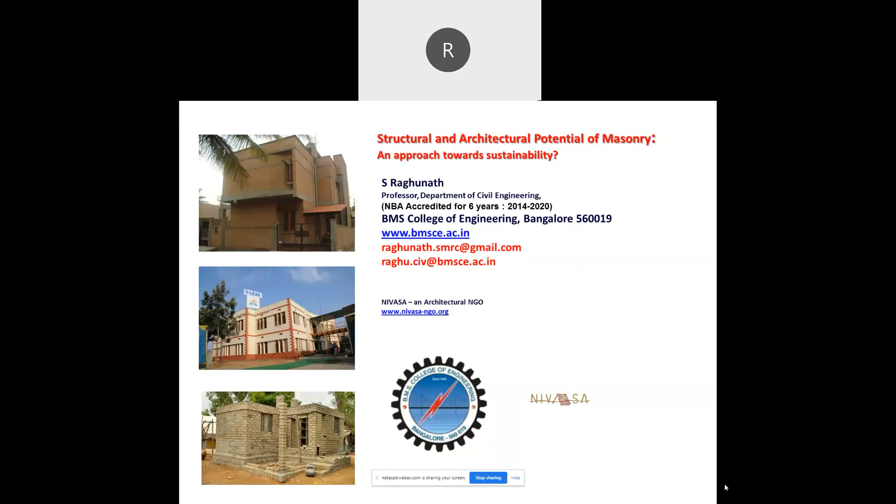I'd also take this opportunity to compliment the organizers for carrying out this workshop for faculty members on sustainable design with pre-engineered design and approach towards eco-friendly design. It's a relevant topic in the current context, and I think it's a good program for faculty members to be involved with. I also saw that quite a good number of eminent speakers are there; my professor, my teacher, Professor Jagdish, was there yesterday, and he is the best person to introduce this course to any participant.

I'm going to discuss a sustainable approach, or rather, I'm going to introduce masonry.

Just a minute, there's some problem with it.

Yeah, I'm going to discuss masonry by dividing my lecture into five parts. Initially, I'm going to discuss sustainability, my personal thoughts on sustainability, and then I'm going to introduce masonry from that lens: how masonry can be considered sustainable. Then I'm going to share the bulk of my content through an introduction to structural masonry and refer to quite a few examples of historic masonry structures.

Then I'm going to move towards the end of my lecture by arguing that masonry can be considered a sustainable construction in many aspects and contexts, and then end my session with a few concluding remarks.

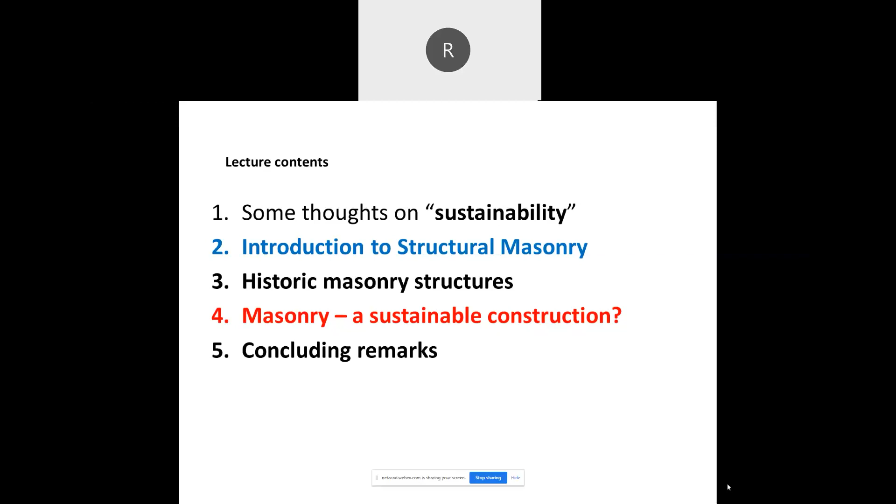You can also talk about sustainability in terms of a time frame, in a context, in a situation. What is sustainable in one context may not be sustainable in another context. What is sustainable in the short term may not be sustainable over the long term. There have been people talking about short-term sustainability and long-term sustainability, though it appears to be some kind of an oxymoron.

By and large, all of us understand sustainability with one clear-cut definition. A sustainable society is considered one in which the society grows, or manages its economic growth, in such a manner that there is no irreparable damage to its environment. This is something most of us would accept. Personally, I also accept this definition.

It satisfies the needs of the people without jeopardizing the prospects of the next generation. So we need to protect our environment and hand it over as a good legacy to the next generation. That's the meaning of a sustainable society.

Although sustainability is being talked about more and more in the current context, Joseph Kumarappa talks about sustainable development in his book, The Economy of Permanence, a very neatly written book, easily comprehensible even by non-economists. He talks about the economy of permanence and equitable development. That is also a very interesting book one can refer to. It is available as open source.

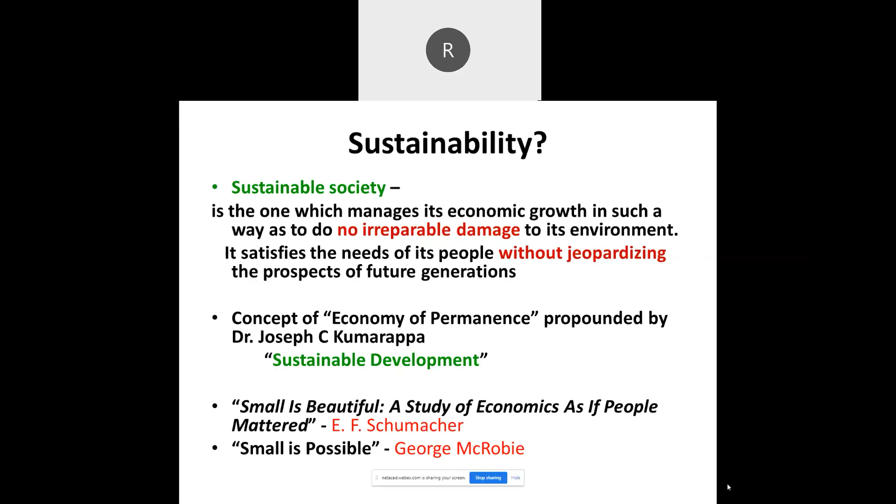Small is Beautiful is a book written by Schumacher. It talks about economics as if people matter. His contemporary and junior, George McRobie, also wrote a book called Small is Possible. These are some of the important background through which I have understood sustainability and tried to contribute to this field of engineering.

The two key concepts of sustainability: first, the concept of needs, in particular the essential needs. You can talk about vital, essential, and desirable needs. The essential needs are those to which overriding priority should be given. If you are able to balance the needs, one can approach sustainability in an easy manner.

Something, either a technology, a product, a process, or a material, is said to be sustainable if it is economically viable, environmentally friendly, and socially acceptable. If all three are satisfied simultaneously, it is said to be a sustainable technology, process, material, or product. On the other hand, if it satisfies the social requirement and economic viability, it is called an equitable solution.

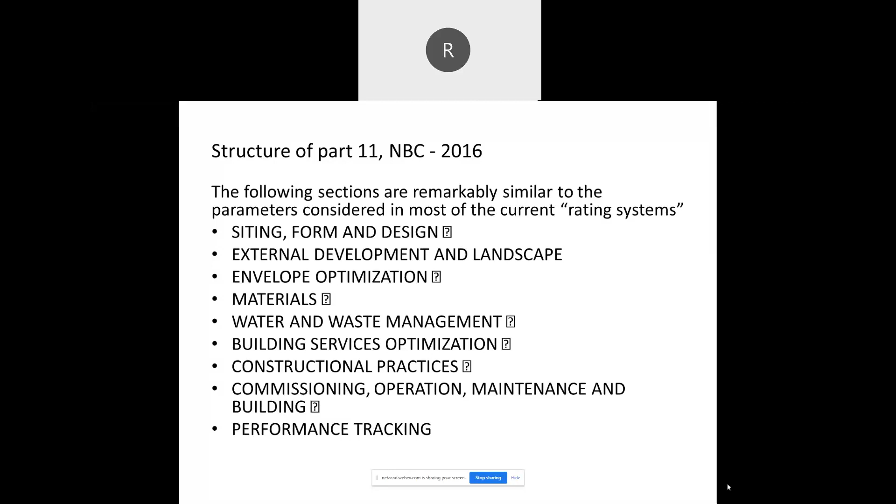It talks about optimization, materials, minimizing the waste, construction practices and technologies, and how to track whether something is working properly or not. In many ways, it encompasses most of the current rating systems, in my opinion. I urge the participants to have a look at NBC 2016 Part 11 to understand this workshop better. With those brief thoughts about sustainability, I will move to the main part of structural masonry. I will try to make a case why structural masonry can be considered a sustainable approach.

By the way, a small break here. I presume I am audible. Mr. Girish? Yes, sir. Very much, sir. Thank you.

This can be understood very easily by comparing it with one of the most ubiquitously used construction materials these days, namely concrete. Concrete is such a popular material that I'm going to use it to compare with masonry. In many ways, both are similar. Both have bigger sized aggregates, smaller sized aggregates, and binding material. In masonry, the bigger sized aggregates, or masonry units, are of uniform size and shape, whereas in concrete, the coarse aggregates are not of uniform size and shape. They are irregular in nature.

And of course, to fill the voids and increase the density, there is fine aggregate, and they are all bound together with the very popular binding material, namely cement. In masonry, the masonry units are joined together with the help of mortar, which consists of fine aggregates and the binding material.

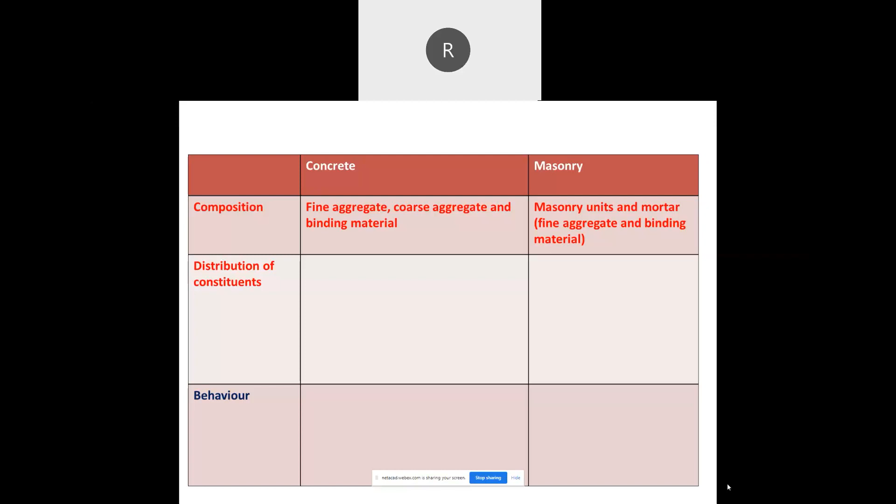In case of concrete, you don't have such well-defined disposition. It's just mixing all the three ingredients together and then pouring it into a formwork. Now, this is the point of departure between concrete and masonry, because the bigger sized aggregates in masonry are laid one by the side of the other and one above the other in a prescribed manner. You don't need formwork. So masonry enjoys the benefits of avoiding the usage of formwork, whereas concrete needs formwork. You need to pour concrete, whereas you need to construct masonry. So one is an advantage and one is a disadvantage.

Because you are pouring the concrete into a formwork, you can have reinforcement embedded into the formwork. Therefore the tensile strength of concrete can be easily achieved through the reinforcements which are embedded into that. So while concrete on its own does not have good tensile strength, the reinforcement makes it very popular: reinforced concrete, RCC as we know it. In terms of behavior, both of them are good in compression, weak in tension and flexure. Both of them are brittle.

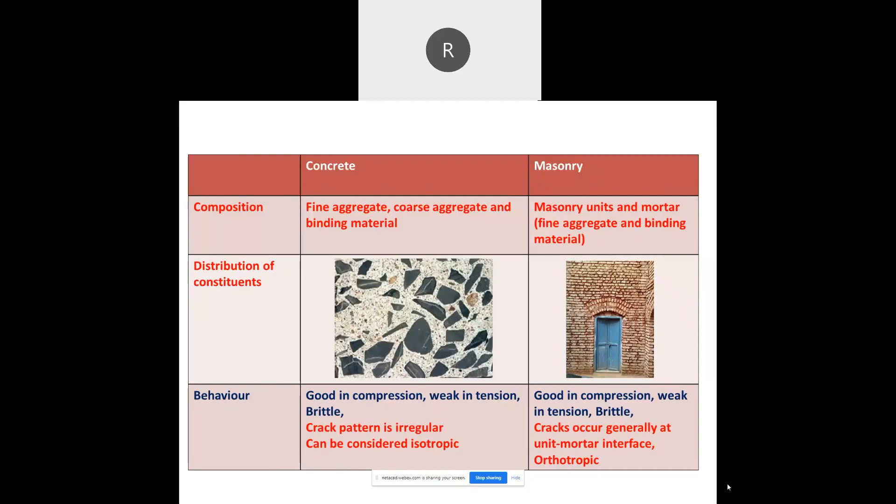As I mentioned earlier, because you are going to use formwork, you can have any complicated reinforcement arranged in concrete, and you can pour concrete. Whereas in masonry, if you want to introduce reinforcement, it is quite involved. The mason has to work a lot to ensure that the reinforcement is placed, and the masonry construction has to happen surrounding it in a complicated manner. So reinforcing masonry is not as easy as reinforcing concrete.

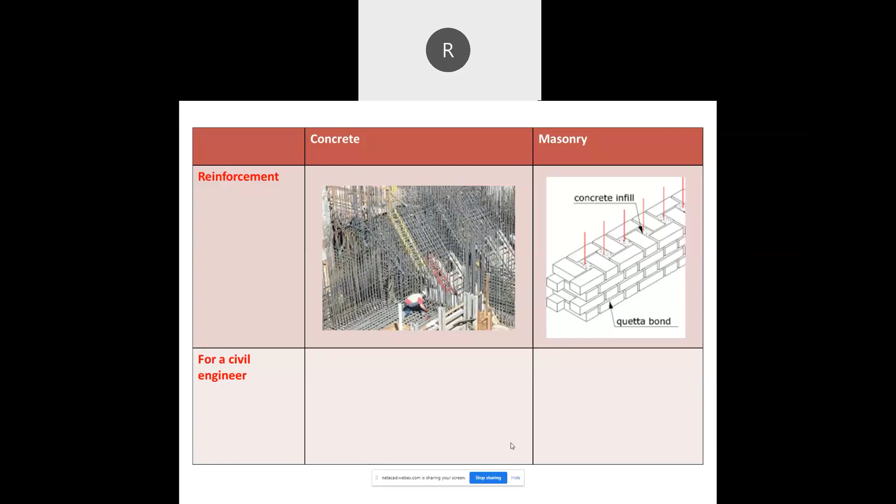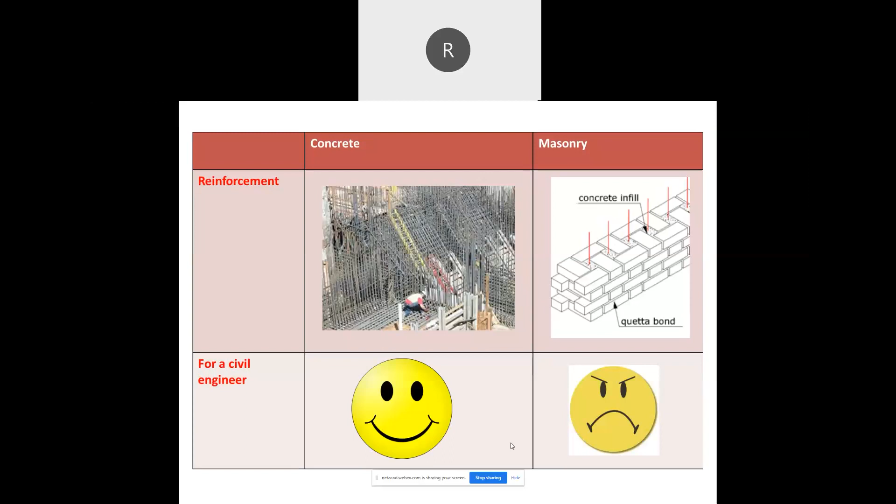Of course, for a civil engineer, concrete is the most popular material, and masonry is frowned upon because of its limitations in terms of strength and performance and so on, though most of them are perceptions. It's the other way around for architects. Architects simply love masonry. It's no wonder that at one point in time all the 7 wonders of the world were made of masonry, exposed masonry.

To sum up, the advantage of masonry is the fact that you don't need formwork. It plays a dual role, functional as well as structural. It is very economical. If it were not economical, it would not have been utilized as a very popular construction technique for thousands of years. It's also durable because you don't use materials which corrode. Unreinforced masonry has been very popular, and you don't have any corrodable material in that. Therefore, it's durable. It is also aesthetic because of the disposition of the masonry units.

Of course, these days masonry can be made ductile very easily. It can also be made lightweight. Earlier, people used to talk about the brittleness and the heaviness of masonry as disadvantages. But these two have now moved into advantages of masonry. You can make lightweight masonry and ductile masonry.

Of course, the disadvantages still persist. Structurally it is very complex. Most of the structural elements in masonry are two-dimensional in nature. For instance, a wall is a two-dimensional component, so it's structurally very complicated. Most of the elements in concrete, especially a framed concrete structure, are one-dimensional, whether the beams or the columns. It's very easy to analyze and understand one-dimensional elements.

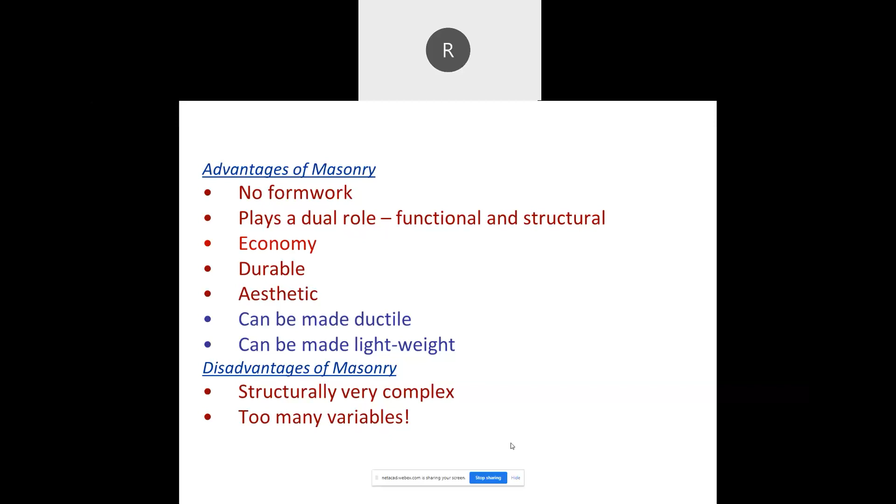To make things quite simple, I have put these 3 bullet points. Structural walls are the major structural elements of a building. They have got 3 roles to play, namely: one, it has to resist the vertical compression. Most of it is because of the gravity loads, the dead load and live load and things like that.

It has to resist out of plane bending. In the event that there is a lateral load, if a masonry building is subjected to lateral loads, the walls of the masonry building will be subjected to out of plane bending. That has to be resisted in the event that you are going to talk about multi-storied masonry buildings. It should also resist the in-plane shear. Again, when there are lateral loads, such as earthquakes and things like that, you need to talk about resisting the in-plane forces.

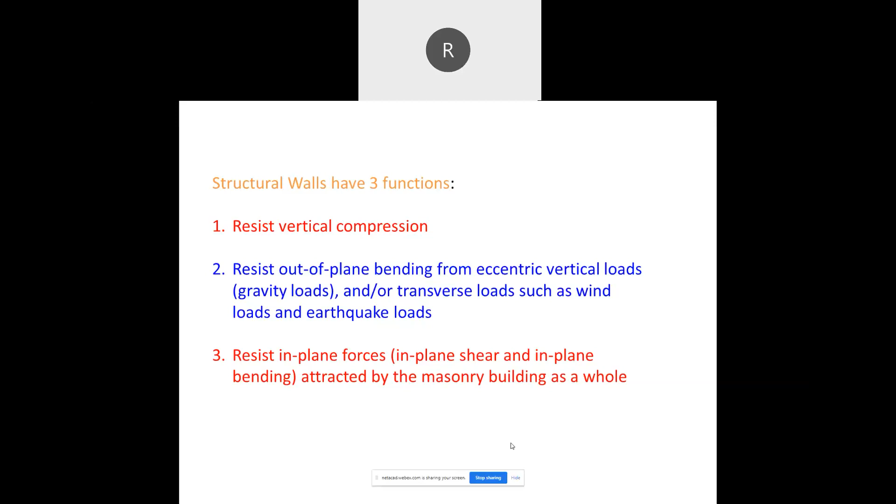So from the point of view of structural mechanics, it has got three major roles to play: resist vertical compression, out of plane bending, and in plane shear. These are the three important things. It is possible to achieve all three things without even needing reinforcement to a large extent for most low-rise masonry buildings. It is possible. I'm going to discuss that also.

A quick background of how masonry walls are designed. A schematic diagram. You can see the load from the floor or the slab or the roof is going to be distributed on the wall. So you need to find out the load acting on the wall, find out the stresses, and compare it or correlate it with the strength or the capacity of the wall.

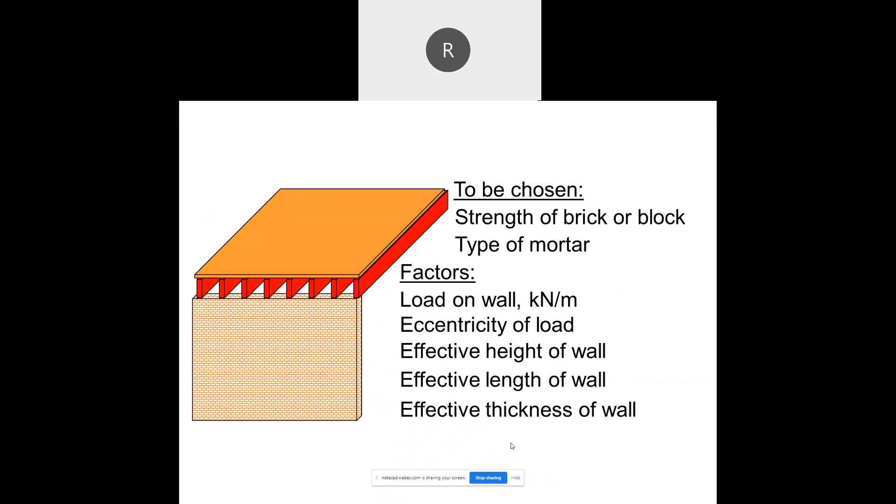Just like in most civil engineering materials, and this happens even in concrete, while the masonry units may be good, the strength of masonry itself could be very low. For example, if the block strength is 40 megapascals, and you are using one of the best types of mortars described in IS 1905, whose strength could go up to 8 megapascals, the masonry strength which is mobilized is only about 3 megapascals.

This happens even in concrete. You can have a very strong aggregate and a very good cement, but the interface could be very weak. So you might have an aggregate whose strength is about 300, 400 megapascals, and you might end up with a 20 megapascal concrete. The same thing happens in masonry also, so this has to be taken into consideration. It is not the strength of the masonry unit alone which dictates the strength of masonry. It's the complex interaction between the mortar and the masonry unit which plays a role in resisting the forces.

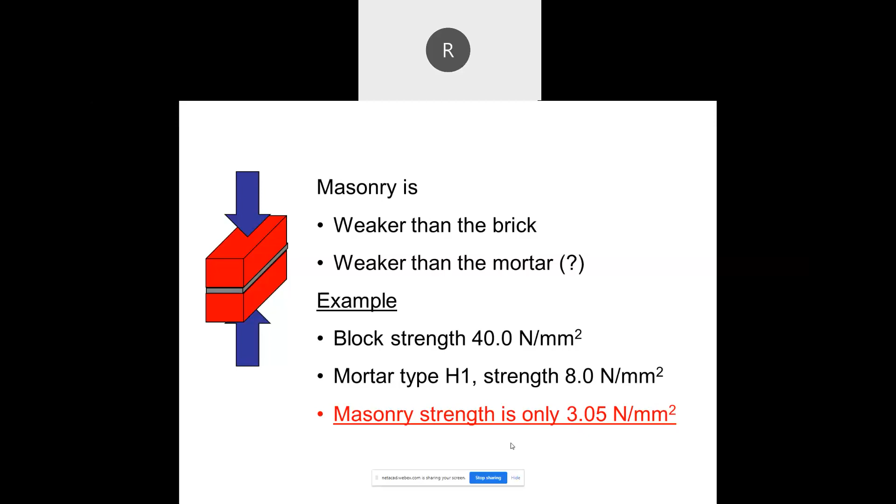Just like you test cubes and cylinders in concrete, you are going to test masonry prisms. It's a representative sample of the masonry units and mortar which are going to be used in the building. You assemble the units one above the other, construct a small prism, and then test it. The compressive strength of this gives the masonry prism strength, or the masonry strength, and that is the one which has to be used for finding out the capacity of the wall.

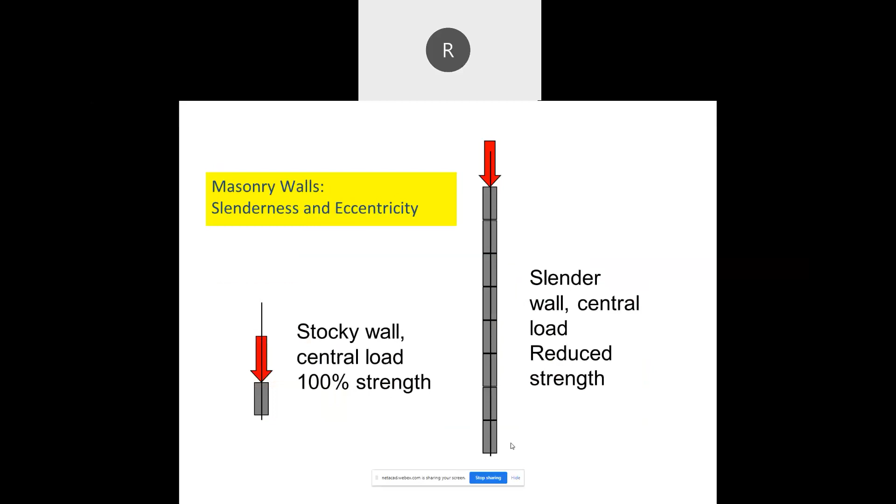Of course, as the wall becomes taller, the capacity reduces, and as the loads become eccentric, again the capacity reduces. This also has to be taken into consideration. So the geometrical aspects and the material aspects are both taken into account. You come out with the slenderness ratios and stress reduction factors, and then design. But more important than all these things is that you need to configure masonry in such a manner that it remains stable for all possible load combinations. That is more important.

If you look at most of the codes on masonry, whether the Indian codes or other codes, they say the first step in masonry design is to get the configuration right. You need a robust configuration. In fact, our Indian code talks about a box type construction. If you have got a room with 4 walls, that is generally a very robust configuration. It talks about getting the configuration right.

Check for the capacity, and configure it properly, then check for the capacity again. In many ways, it's a stability based design, whereas concrete and steel are strength based design. You check for the strength and for limit states of performance like deflection, and so on. In masonry, it is stability based design. You get the configuration right and then check for the capacity. So getting the configuration right plays a very important role in masonry. This is something one has to understand before we discuss masonry design.

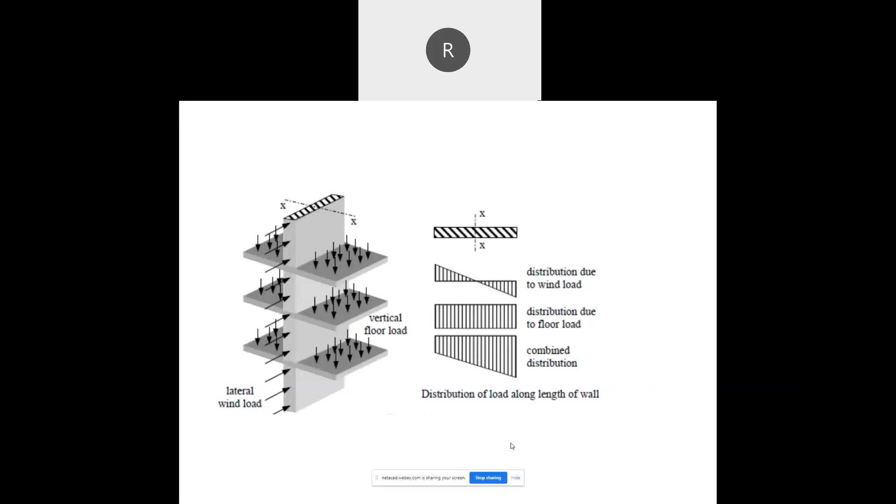A quick comparison between load bearing masonry and a moment resisting RCC framed building. In an RCC framed building, much of the vertical load is taken by discrete elements known as columns. In load bearing masonry, the walls are the ones which bear the vertical gravity loads. You can easily see that the stresses acting on masonry walls are quite small because of the larger footprint we get. That's a benefit which masonry enjoys.

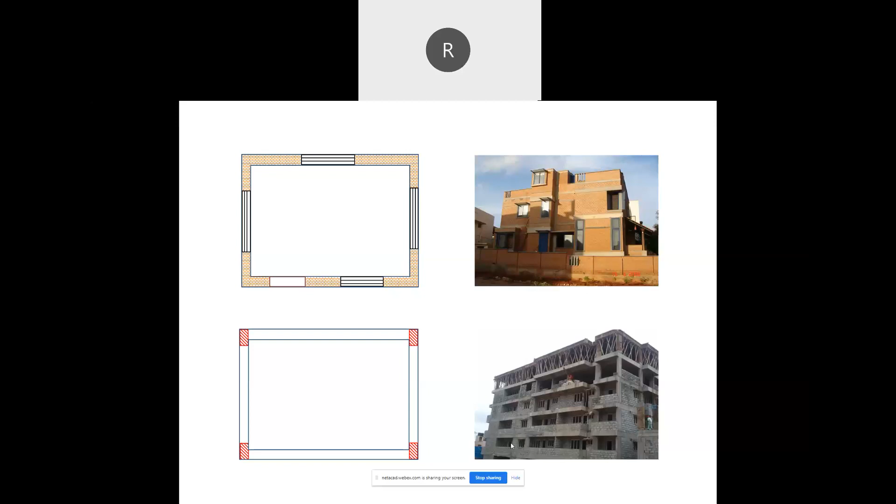You don't need M20, M30, or M50 grade concrete. You can construct 5 to 6 story masonry buildings using M10 grade masonry itself. It is possible because the stresses are really very low, since you have a large footprint at the base of the building. So that's the difference between a load bearing system and a framed system.

Now to summarize the brief introduction to the structural mechanics behind masonry, especially unreinforced masonry: in case of unreinforced masonry structures, the lateral stability is provided by gravity. Thicker walls, well configured walls, and well disposed walls are the ones which provide the lateral stability. No part of unreinforced masonry is allowed to develop tension. It is a compression dominant topology. No part of masonry is allowed to develop tension because tensile strength is quite negligible. You don't want any part of masonry to develop tension. So these are the two important things.

Hence, unreinforced masonry structures have to have a sufficiently large base width so that the resultant of all the forces typically passes through the middle third. This ensures it does not cause any tensile stresses in any of the wall elements. Now, very interestingly, adhering to these two cardinal requirements, there have been fantastic masonry structures constructed. I will take you to those examples and then move on to the third part of my lecture.

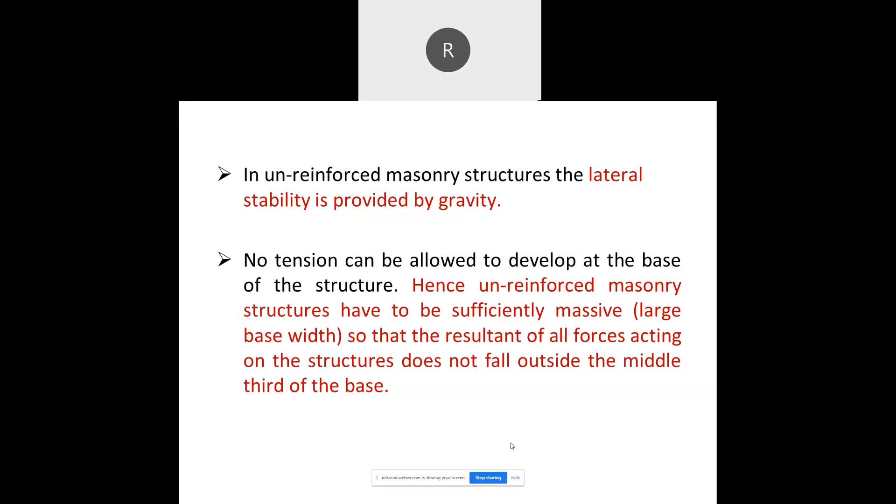To sum up, masonry is a compression dominant topology. There's one example where you can simply arrange the masonry units to ensure the forces are compressive in nature, and stability is achieved by proper geometric configuration. I will move to the third part of my lecture, where I'll discuss quite a few examples of how masonry has been configured to take care of only these two things: lateral stability provided by gravity, and no part of masonry subjected to tension. You can notice that these two were never a limitation to the ingenuity and innovativeness of the engineers.

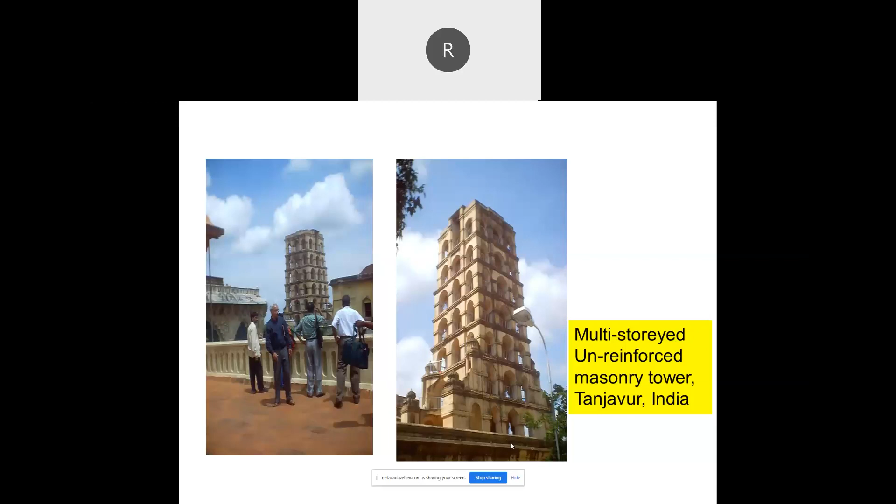It's completely constructed using brick and lime mortar, no reinforcement at any location, and so well configured that you don't have any distresses noticed in this structure. It's a tall structure that has withstood all the environmental effects over the past 250 years, with absolutely no distress at all. On the left hand side, you see my picture. I will move on to other examples.

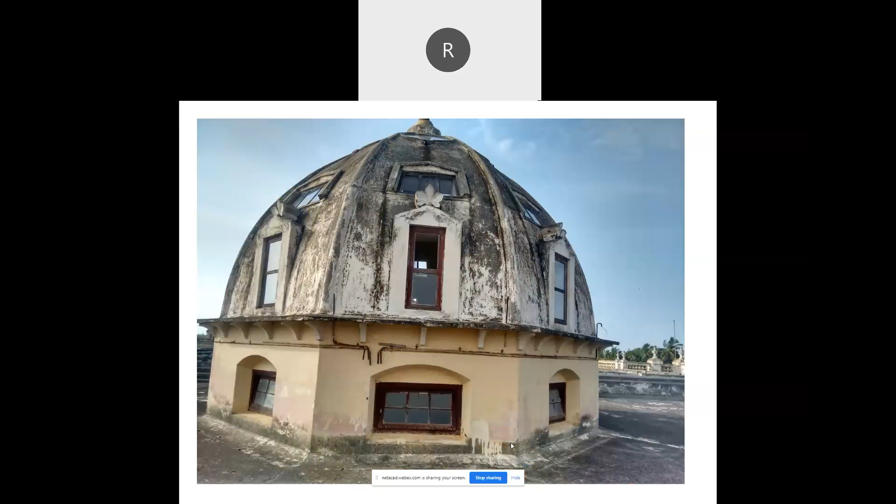This is another example of how masonry can be made a compression dominant topology—one of the domes of the Jayalakshmi Vilas Mansion Palace in Mysore. The dome itself is very interesting: the polygonal dome has 3 openings—one rectangular longer opening, a wider one, and a circular opening almost at the tip. It's a sort of ribbed structure. If you take a vertical section it is hemispherical, and a horizontal section it is octagonal—so it's a polygonal dome with compression dominant topology.

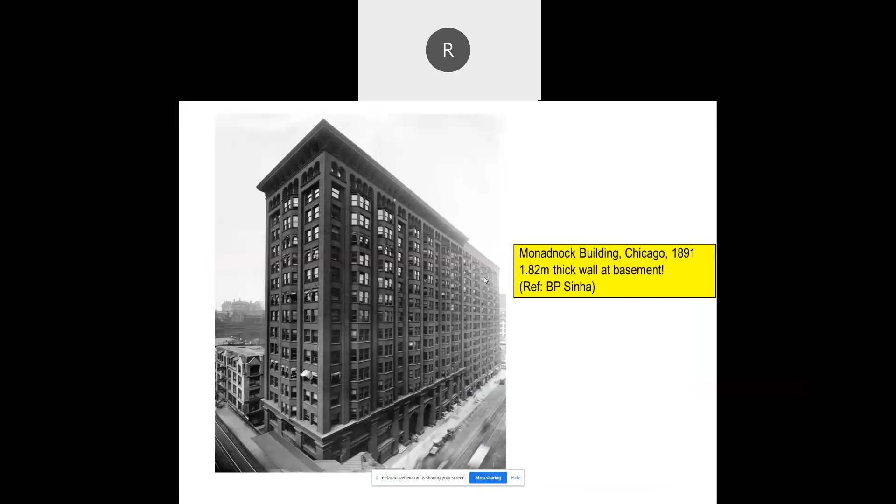Few examples from other countries. This is the famous Monadnock World Heritage Building in Chicago. It was constructed way back in 1891. Of course, at that point in time, people did not have adequate knowledge on stability-based design and configuring the masonry walls for adequate stability, so they used to construct it with thick walls at the base. The wall thickness at the base is almost 1.82 meters, more than 6 foot. It's a 16-storied multi-storied building, one of the first multi-storied buildings, much before RCC came into picture.

As soon as this was done, there were a lot of efforts to understand and exploit the advantage of masonry, and University of Edinburgh has been doing a lot of work. This is something I have borrowed from the book by B.P. Sinha. There is a very interesting experiment of a 5-storied masonry building constructed using 100mm wall thickness, and all the floors were loaded to its complete capacity. After loading all the floors, one of the walls was removed in the ground floor. Despite that, the entire building remained stable. This gave a lot of confidence on stability-based design.

To put it in a very simplistic manner, if there are 4 walls in a masonry building contributing to a box-type construction, you need to analyze and design it such that even when 2 opposite walls are removed, the structure should be in a stable equilibrium condition. That's how it is designed. So if there are 4 rectangular walls contributing to a rectangular form in plan, even when you remove 2 opposite walls, the loads are taken up by the other 2 remaining parallel walls. That's how you need to configure it.

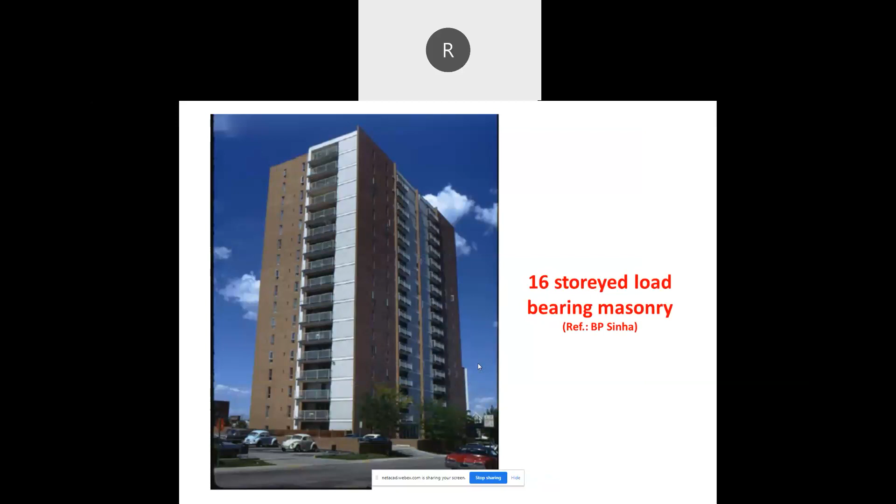This concept was understood very quickly, and then Europeans started constructing multi-storied buildings. Quickly, they came out with a 16-storied masonry building using only 200mm wall thickness. Again, it went back to USA - they constructed an 18-storied masonry building using 200mm, eventually only 150mm thick at the top. This was in Cleveland. People quickly understood the concept of stability, that you can achieve stability by getting a proper form.

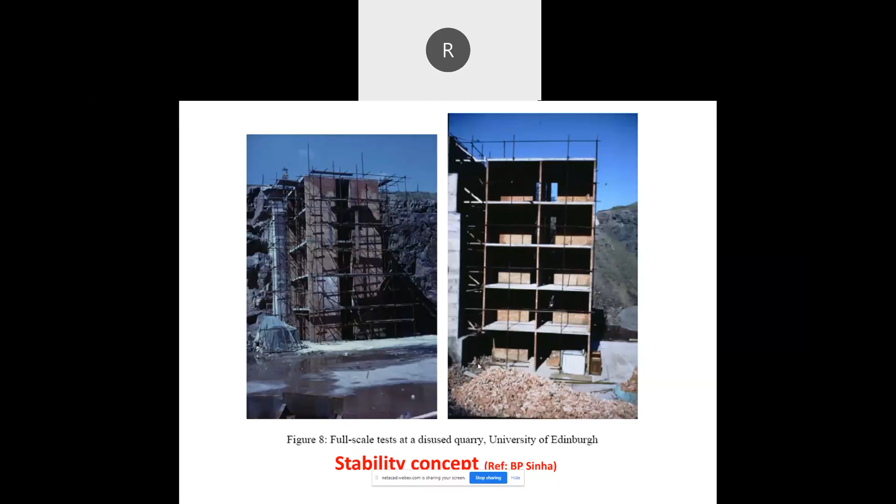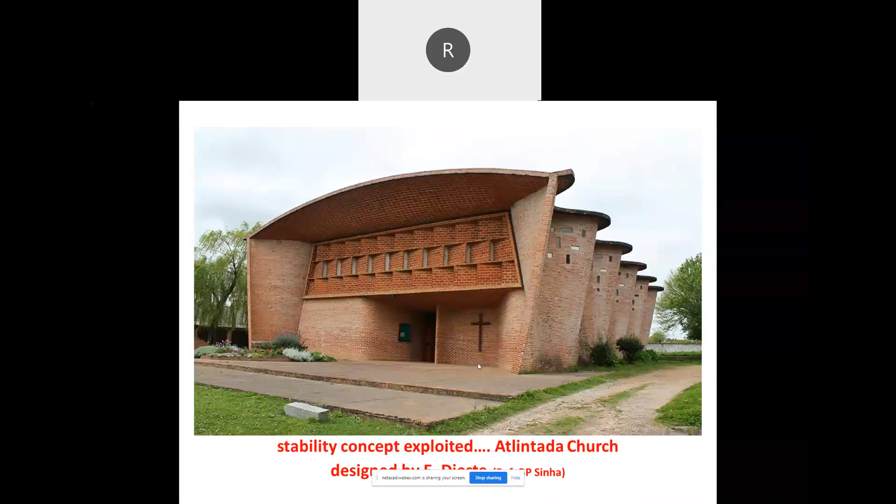One of the forms which I have been mentioning quite a few times is the box type configuration. You can also have hybrid configurations - tubular configurations and so on and so forth. By that time, people had comprehensively understood masonry, and it was exploited even further. Quite a few architects exploited masonry to the maximum possible extent. They are all structures of beauty.

The church designed by Eladio Dieste is an example that you can achieve stable configuration not necessarily by straight vertical walls. Here is a very interesting example of the walls of this church building - in plan, it is sinusoidal in nature, and in section, it is parabolic, hyperbolic parabola. That's the beauty of this masonry building. You can achieve stable configuration using any geometrical pattern. Most of them work on the concept of intuition and then checking out with models and things like that. This is one of the beautiful examples of a stable configuration, not necessarily using vertical walls.

This is an inner view of that. You can see the beauty of masonry, the exposed masonry. The roof was also very interesting - it's reinforced masonry. I will come to that very soon.

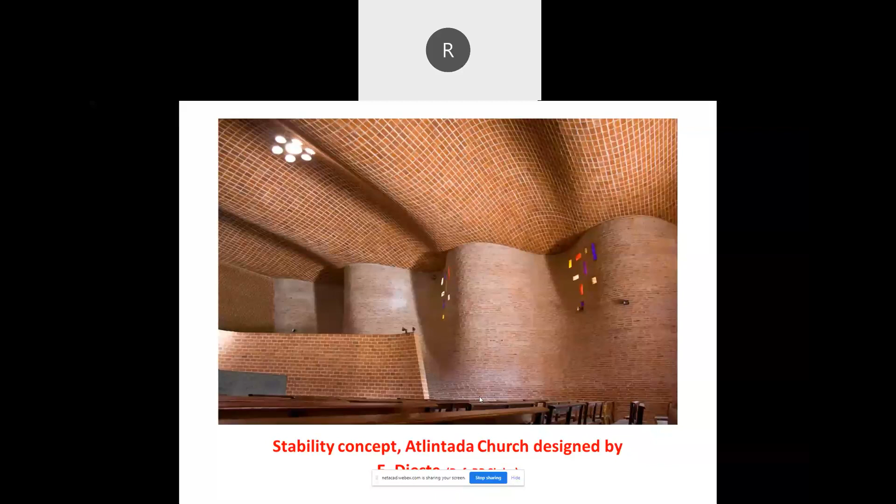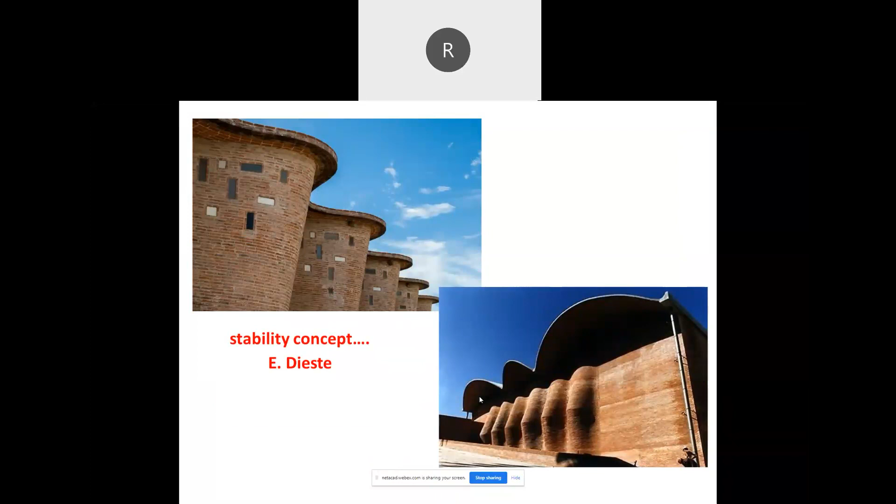This is another example - hyperbolic paraboloid on the walls, and this the other example. It's a thin shell, protruding shells, to take care of the configuration on the lateral forces.

And much before Eladio Dieste started exploiting masonry to the maximum possible extent, I cannot miss any lecture on masonry without quoting Antonio Gaudi, one of the famous architects, who was inspired by nature and then constructed fantastic masonry buildings.

And how he achieved this was very interesting. You know that when you take a tension member, a catenary, and support it at two ends - if you take a chain and support it at two ends, it will be subjected to pure tension, and inverse of that, when you flip it, then it has to be pure compression. So what he did was the same thing. He got the form by suspending several small weights into a form he wanted, from the ceiling, and he projected the section he got on the vertical walls, and then inverted and then got the compression dominant topology.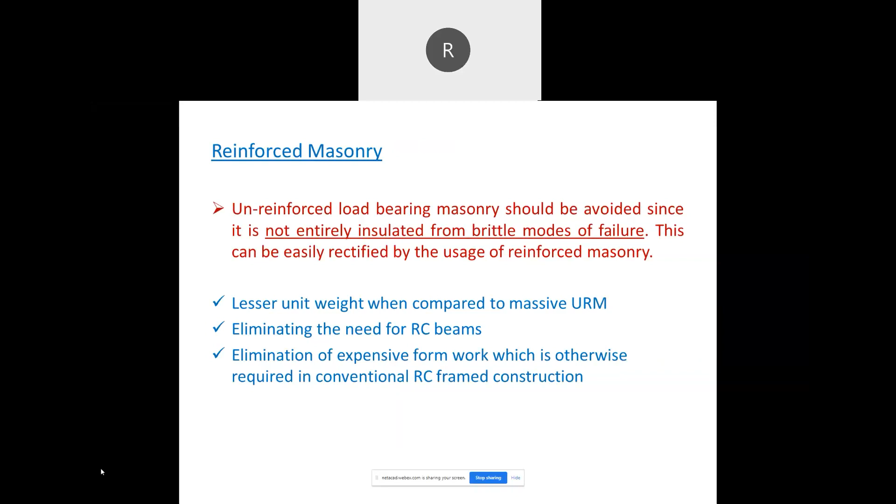Of course, the advent of reinforcement and reinforced masonry made it even more fascinating. The advantage of using reinforced masonry is that you will get multiple benefits - it can become ductile, you can prevent the brittle mode of collapse, and you can design it to withstand lateral forces very easily. These are a few examples.

Now in Western countries, people talk about pre-stressed masonry also - we are yet to come there, we are just making small beginnings in reinforced masonry. I just wanted to share this picture of reinforced masonry.

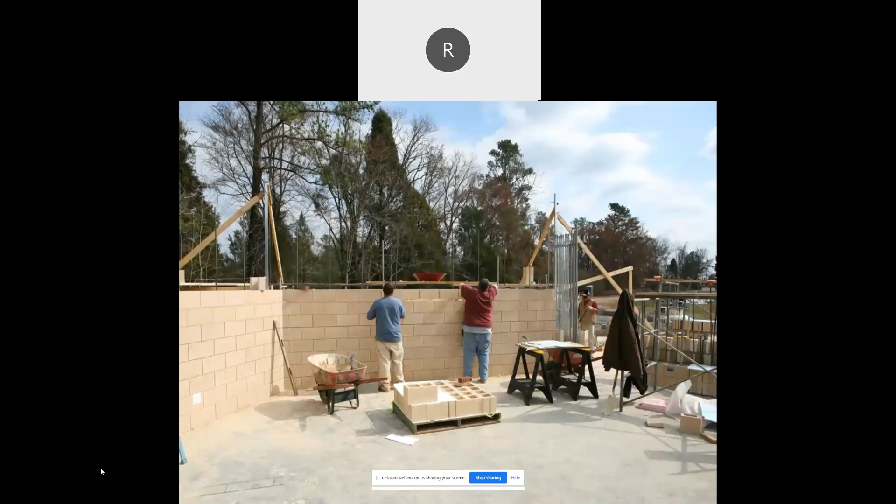I'll quickly move on to masonry construction practices in developed countries, especially from the point of view of how it is made sustainable. This is how masonry is constructed in the current context. They have long back done away with solid blocks - they know that solid blocks are no longer efficient, so they use engineered hollow concrete blocks, engineered to its complete extent in terms of strength, performance, the size, and the shape. You can get any strength, any size, any shape, any texture, any color - it's engineered to the maximum possible extent. These are all the engineered blocks - you can see the beige colored blocks being used.

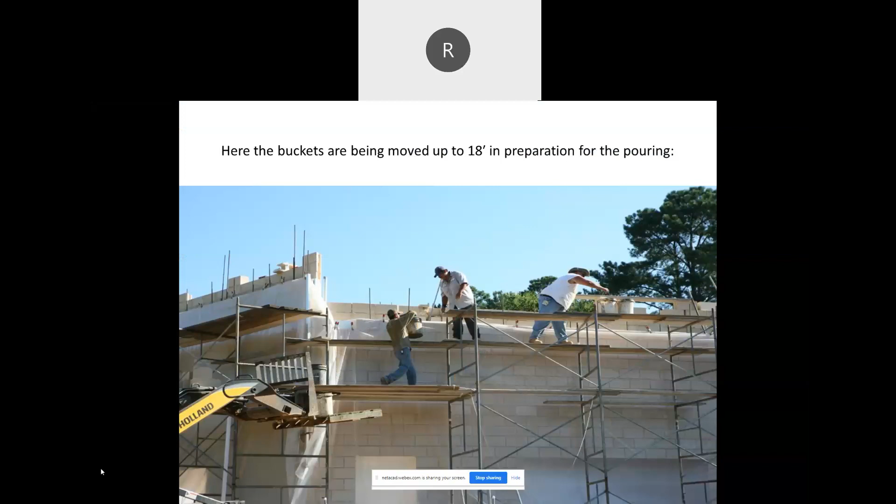And this is how it is constructed. The mortar is also engineered - they use lime dominant mortar, for ease of workability, and very compatible with the blocks. And the way they do this is so very sustainable - you hardly end up with any wastages. You don't need plastering - that's one of the biggest advantages of exposed masonry, so the cost comes down, use of material comes down.

And you can notice a small detail of covering the wet process with a plastic sheet - it prevents the spillage of mortar onto the exposed masonry, so you don't need any repetition of cleaning and things like that. Neatly configured, well-defined set of operations. This is how they do it in the Western countries, be it in the European countries, New Zealand, Australia, or America. In fact, even Brazil has got fantastic examples of such construction techniques which are adopted.

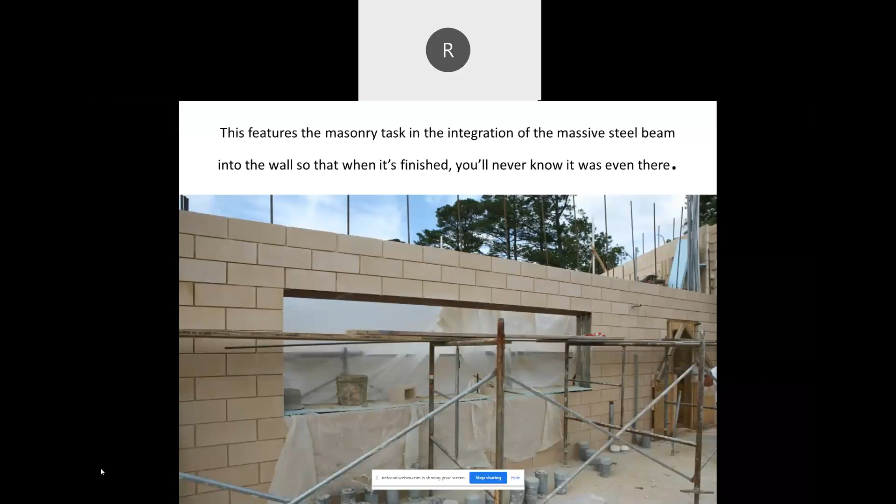I will come to the fourth part of my lecture. In a way, this is also the main contribution to this lecture, in the sense that how masonry can be considered as a sustainable construction. Is it socially acceptable? Is it economically viable, and is it environmentally friendly? We will discuss these things again through examples.

I'm going to discuss the sustainable masonry construction approach through case studies. I'm going to take up all three scenarios: the rural context, the semi-urban context, and the urban context. I'm going to talk about my own experience while I have been engaged with this architectural NGO by name Nivasa. We are working towards enabling humane housing solutions for very poor people.

This is a village in Kanchipuram district. Actually, it's quite close to the city of Chennai, about 65 kilometers away. There are some tribals living in such type of tenements. It's just about a 4 feet high wall. Of course, it has got a very comfortable thatched roof, thermally very comfortable. 4 feet high wall, it has got 4 walls made of mud.

Rudimentary construction. But they are living in very inhumane construction. They don't have toilets. They don't have separations inside the building. During the heavy rains, many of these people suffered a lot. So we were asked to engage with them to come out with solutions for that.

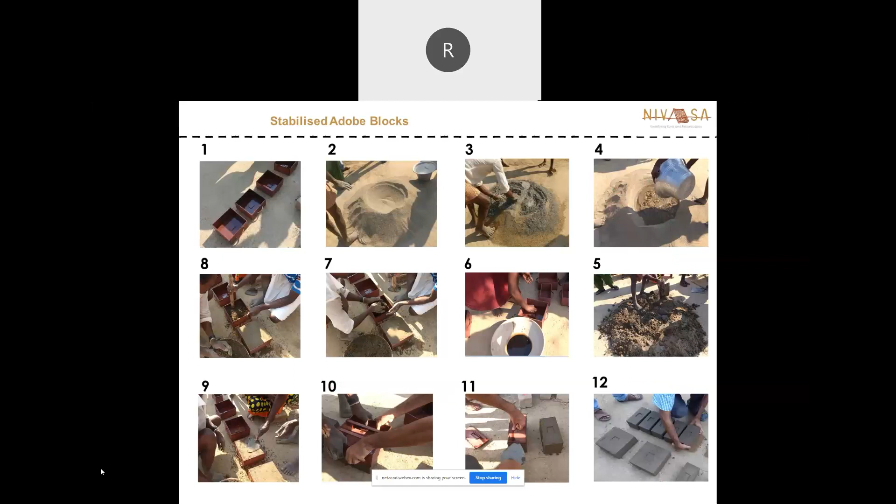So we had to educate them on how to construct masonry, and of course, cost was a major constraint. Using locally available material was another major constraint, and then the fact that they had to do it themselves to avoid construction cost was also another major constraint. So we trained them on how to make adobes, stabilized adobe.

Professor Jagadish and his team, Dr. Yogananda and Professor Venkatarama Reddy, have all contributed a lot to stabilized mud block. And stabilized adobe also came out well with one of the interesting moulds designed by Yogananda and his team, the 5-sided mould. So we trained these people to make their own blocks.

The locally available soil was engineered, or you can call it processed. The unwanted material was removed. Only dominantly sand was used, a little bit of silt and a little bit of clay, and you add the required amount of cement only to the extent that you need strength for G+2, in the event they want one more floor to be added.

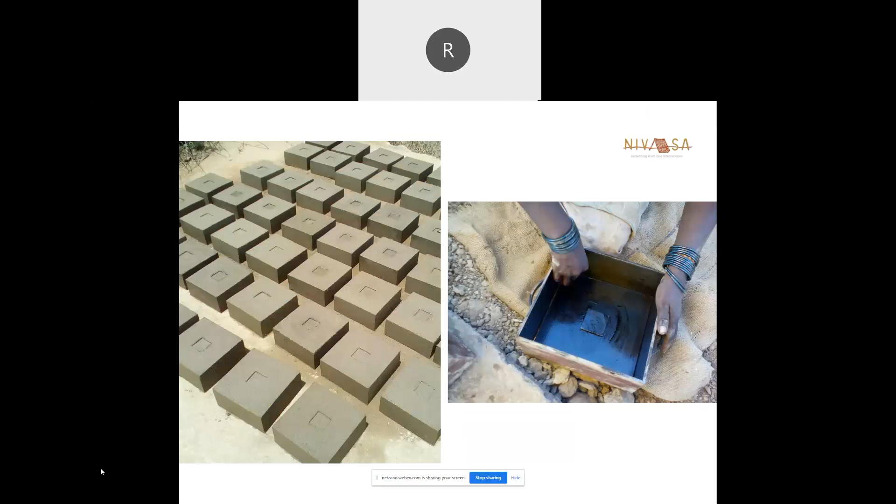You mix it thoroughly, and then pug it properly, hand compact it, eject it. You don't need machines, you don't need power. You just eject it, stack it, cure it, and then start using it. So this turned out to be a community process. All the people started making these bricks whenever they had free time. At some point in time, they had sufficient bricks to construct their house.

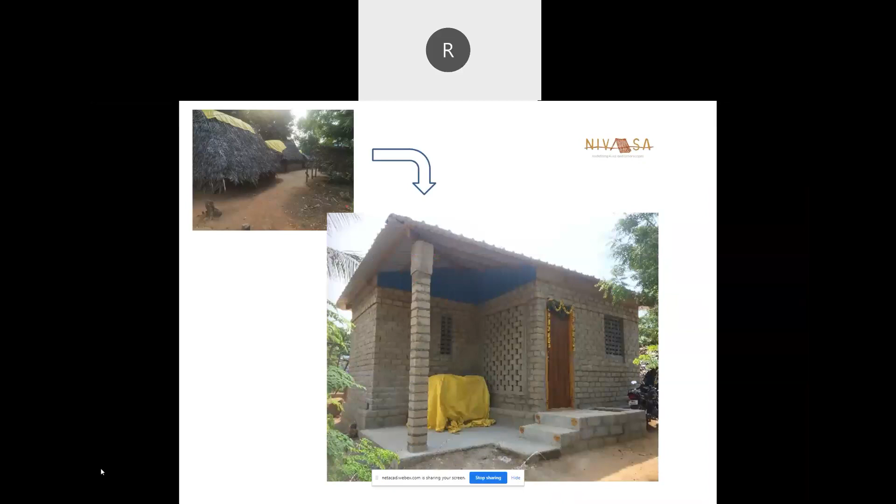They started constructing it. Of course, it's an engineered brick. It needs the due diligence of correct proportioning, weighing and casting, and then compacting, curing, stacking, everything. So all this training was imparted to the villagers, and then they came out with this type of housing. So they were able to get a robust house at a very low cost.

The point which I'm now trying to tell is, this is a sustainable approach to one of the housing problems. Initially about 6 houses were constructed using this. Now there are about 15 families who want to construct houses like this, and gradually people from other villages also want to emulate this. So this is a very sustainable approach. They got a very good house, as they had aspired for.

So with this type of technology, it is socially acceptable and environmentally friendly, in the sense that we have been using locally available materials. Of course, cement is the only one which is a bit expensive and brought from elsewhere. That's a small price which you need to pay to get such a drastic change in the configuration of the house. So, back in Karnataka, there are innumerable poor families living in villages.

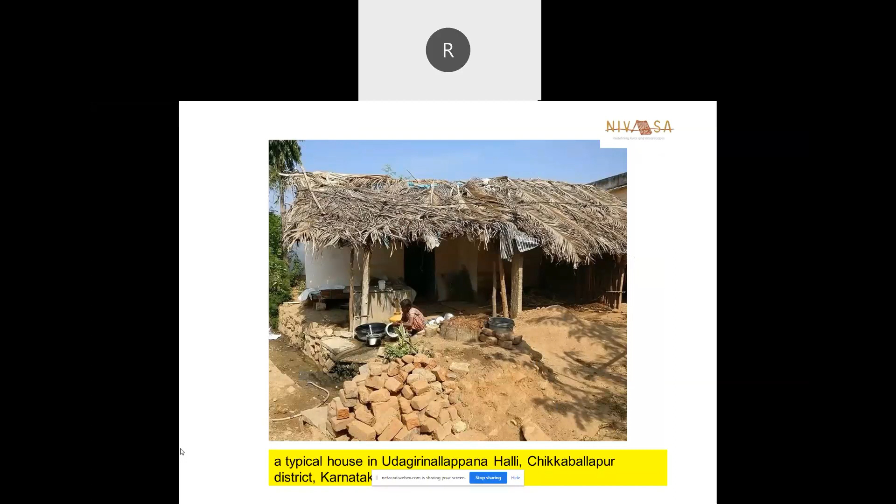I'm going to talk about one village in Chikkaballapur district, the Udagirinallappana Halli. There, people, although they are economically well off, somehow are not able to mobilize funds good enough to construct a pakka house, so to say. So they were residing in rudimentary houses with some temporary arrangement of thatched roofing. They replace this thatched roofing after every season, and they continue to live there.

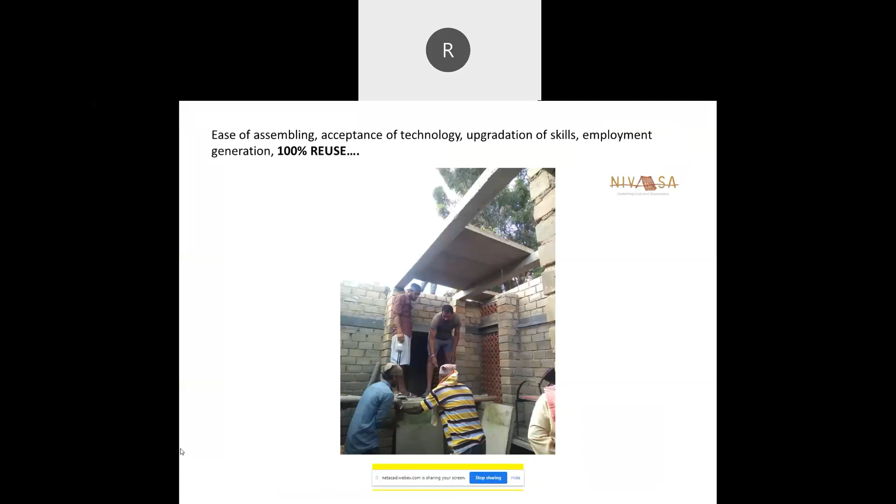So they had aspirations for constructing a pakka house. They were also trained with the same stabilized mud block technology. All of them started participating. We also trained them on how to make their own roofing elements. So they were able to quickly assimilate this technology and come out with beautiful houses for themselves. So here is the training process which was given to the villagers.

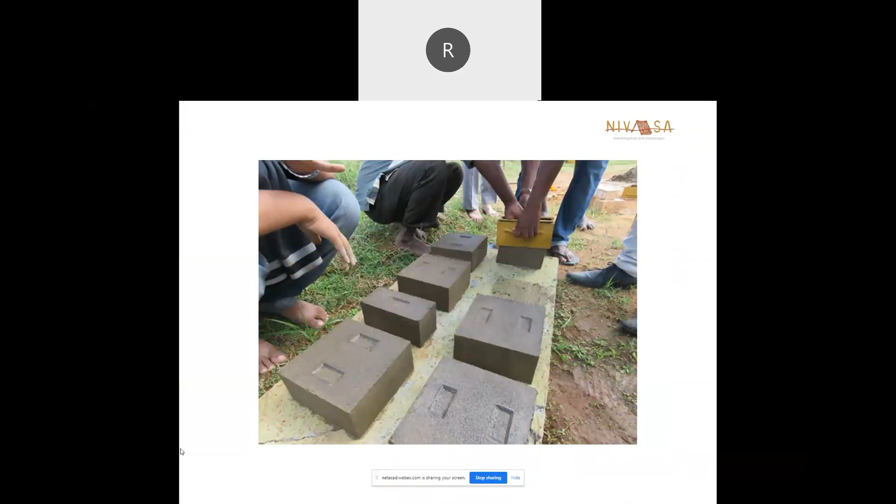And then, of course, stone is available in plenty in that region. They used stone as a sill level band and the lintel level band. They also used stone for the roofing system, the chapdikal, stone slabs, stone panels. The walls were made of stabilized adobe.

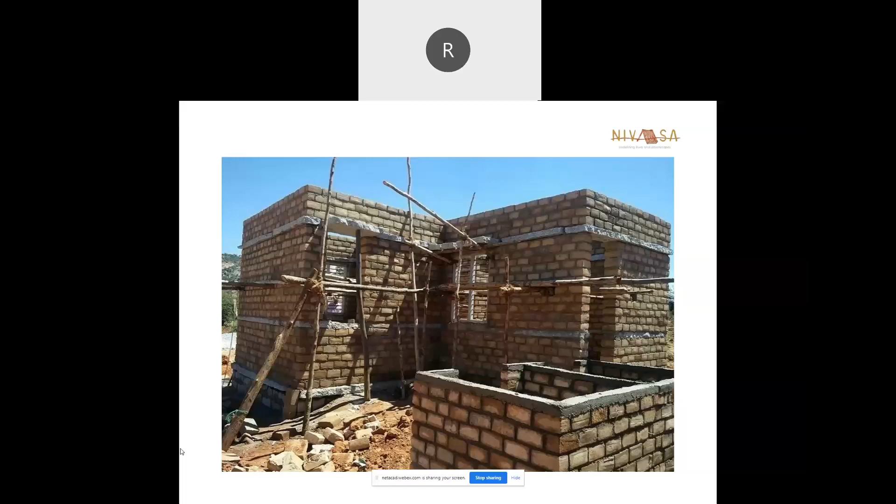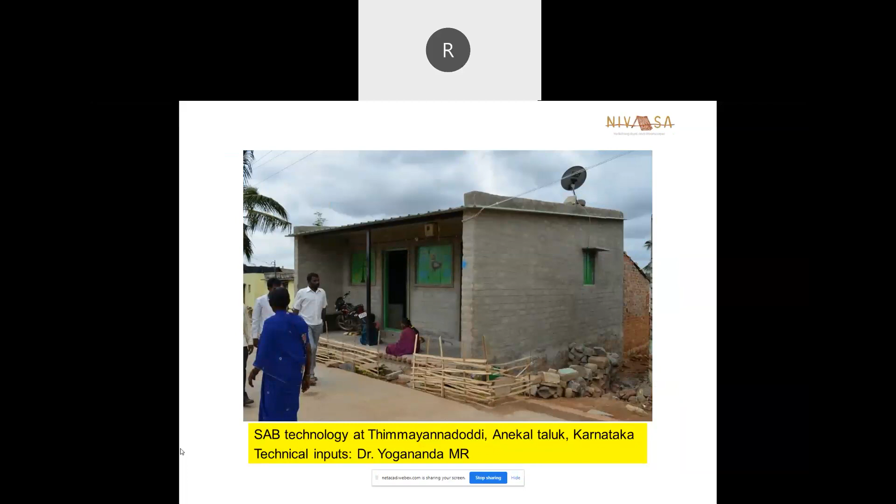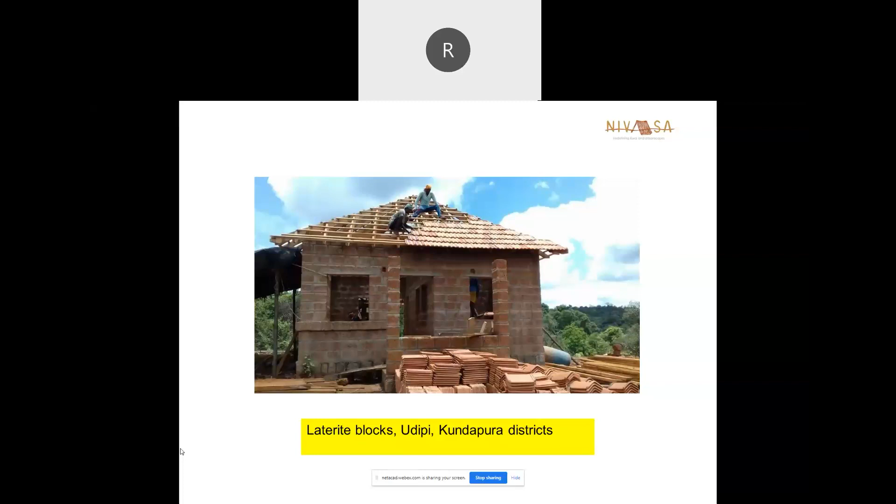This is a small hamlet near Anekal Taluk, just about 35 kilometers away from the center of Bangalore. They were also provided stabilized adobe. And it's not that stabilized adobe is a solution for all housing problems in the rural context. In and around the Western Ghats, in Udupi, in Cherkadi, there are laterite blocks available. This is one of the houses. Of course, you need a sloped roofing system there to take care of the rainfall. Laterite blocks are locally available materials. These are all sustainable approaches to local problems. I will move on to a semi-urban context.

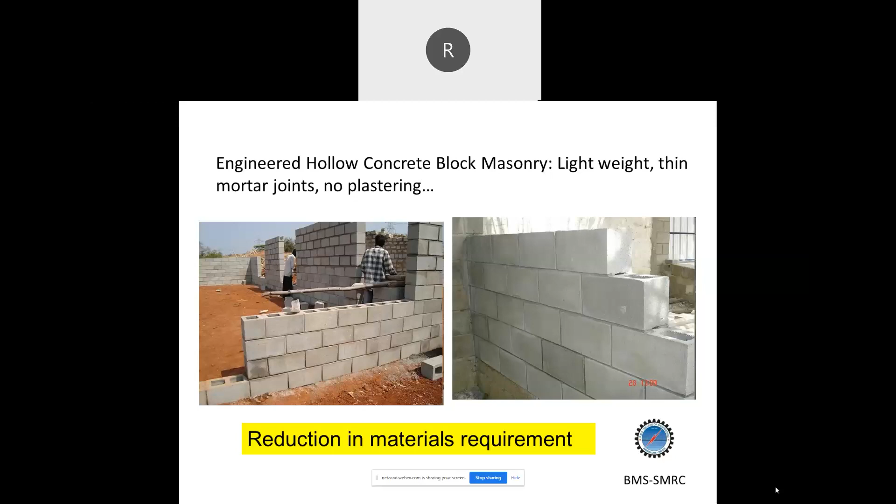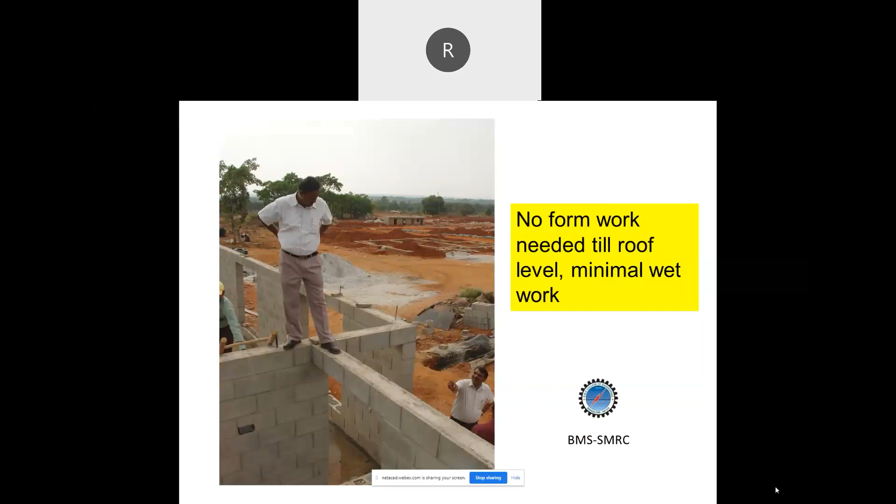And of course, to exploit the advantage of masonry, the lintel was also made of U blocks. You see my two good friends from my department, Professor Ranganath and Professor Suresh. So there is this U block, which is used as a lintel. Again, you don't need formwork. You use the U block itself as formwork, place the reinforcement, pour self-compacting concrete, and then finish off the construction.

So these are the houses which were constructed. They got the multiple benefits of cost effectiveness. Sustainability was, of course, the main target. They ended up with a platinum rating for adopting this technology. It was one of their key points, apart from the other things which they did in their project.

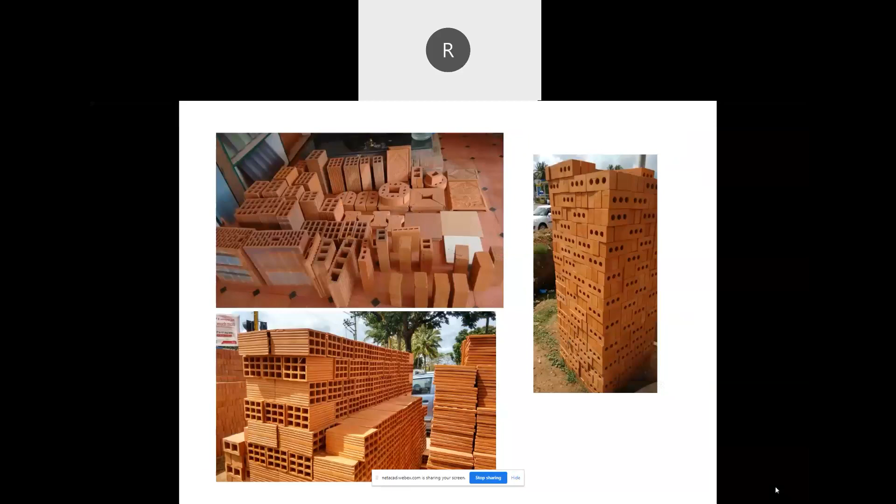Of course, there are other engineered masonry units. Very popular among them are the terracotta products and the clay products. You've got clay roofing elements, wall elements, column elements, pillars, flooring elements. A variety of products are there. Vertically perforated blocks, horizontally perforated blocks. The vertically perforated blocks also enable the insertion of reinforcement. Should you want to go for reinforced masonry, you can also do that. These are available in almost all parts of India.

So this is yet another example of an institutional building in Mysore, the Swami Vivekananda Youth Movement Campus in Mysore, which was constructed using engineered hollow concrete block.

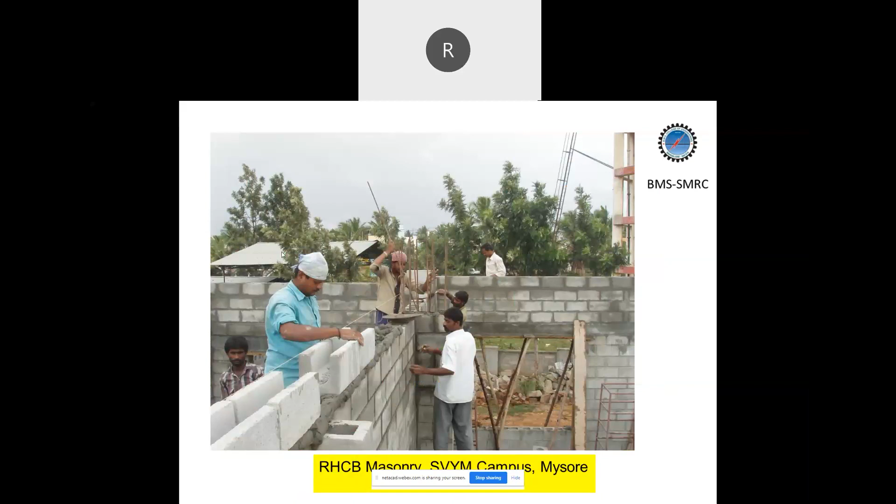You see the placement of the lintel blocks, and you see the structure being dispensed with RCC, the conventional RCC elements. So wherever there is a requirement for a huge beam for the large span, instead of using a conventional RCC column, we suggested reinforced masonry column. So you see the reinforced masonry columns.

It's a dominantly load-bearing system. The walls are also carrying the load, and of course the reinforced masonry columns are also taking the load. So none of the elements here is redundant. In a framed system, the infill wall is structurally redundant. Whereas in case of a load-bearing system, reinforced masonry, the walls are also structurally participating in carrying the

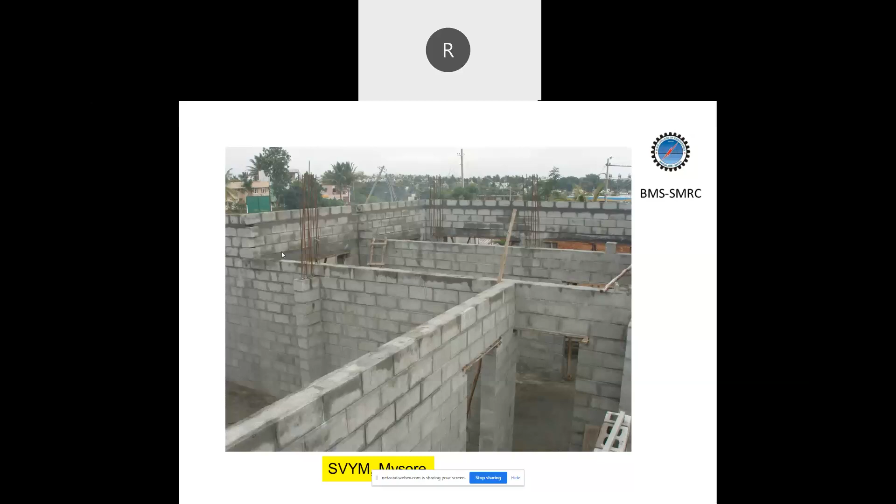load. So that way, it is going to ease out the stresses and distributes the load sort of equally on all the structural components. So this is the advantage of using reinforced masonry. Again, because the reinforcement has been introduced through the hollow portion, you don't really need formwork. It's an exposed masonry construction.

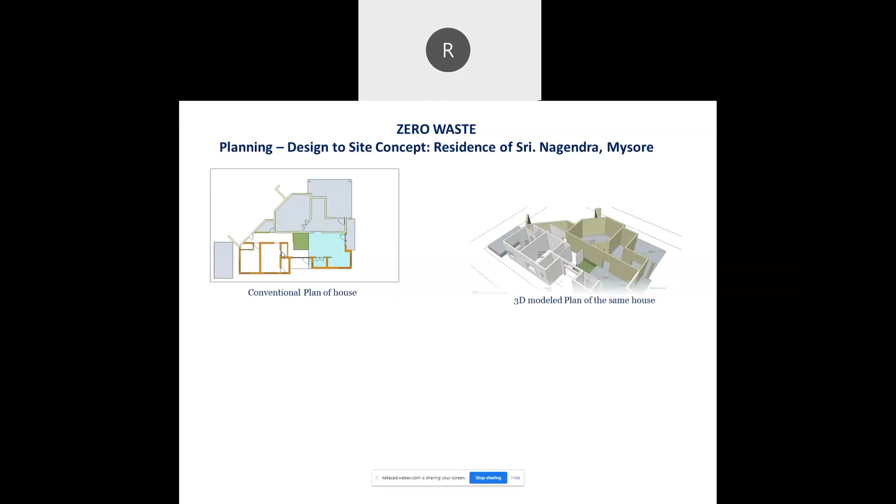Yet another example of how to minimize the wastages in masonry construction by looking at the way masonry construction is practiced in Western countries. Well-defined set of operations, zero wastage or near zero wastage. Quite a few people in Mysore were enamored by that process, and they started practicing this. I'm going to give an example of one Mr. Nagendra, who happens to be an electronic engineer, who came out with a very innovative way by which he could achieve virtually zero wastage.

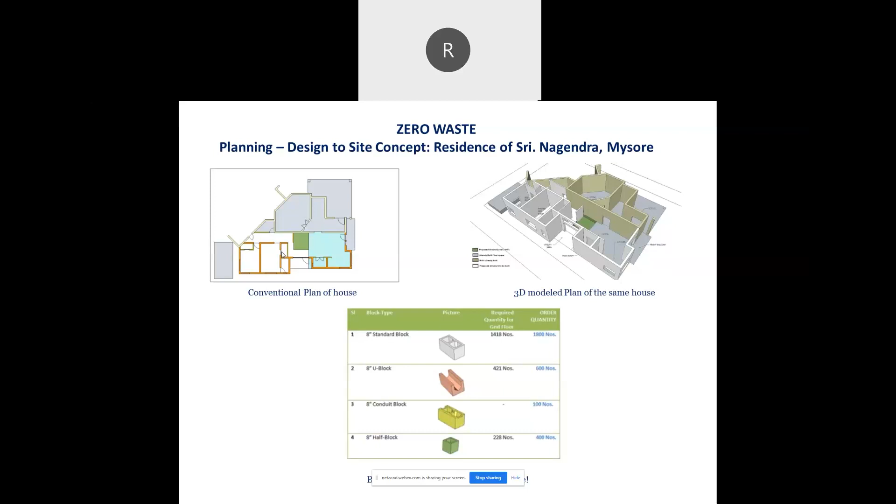So he had color configured the requirement of the appropriate blocks for the appropriate location. The full block, the half block, the lintel block, the conduit block, and looking at the availability. So he had given a color coding for his building, and then the correct block went to the correct location.

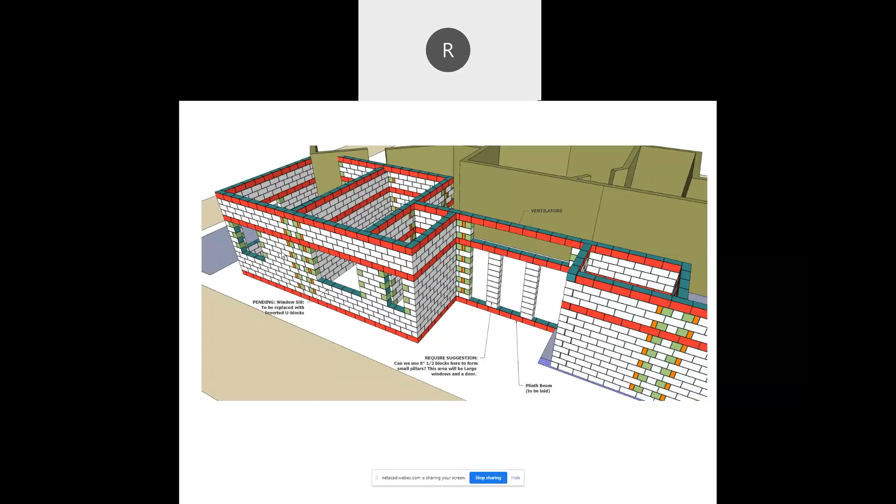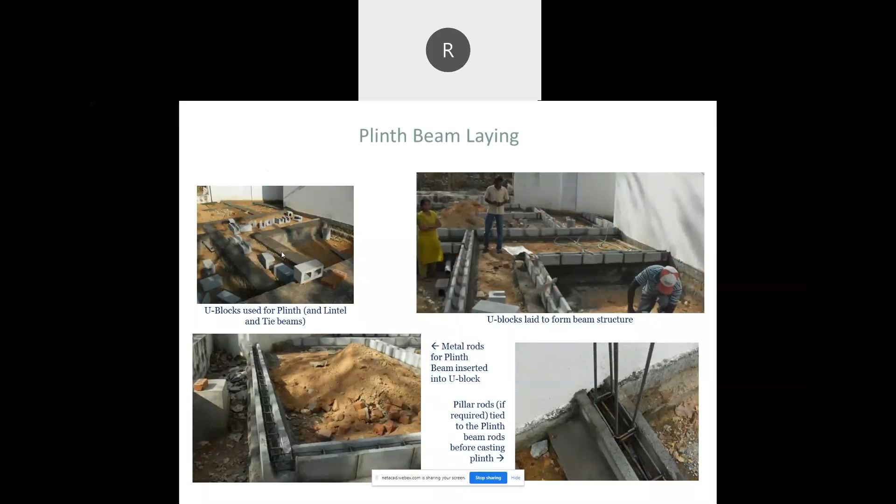And we had also designed a template to minimize the wastage of mortar. The mortar should not spill into the hollow portion. Taking out or scooping it out would become difficult. So a template was also designed. The wastages became very minimal. So this is yet another approach to sustainable construction. Virtually zero wastage and reduction in use of materials.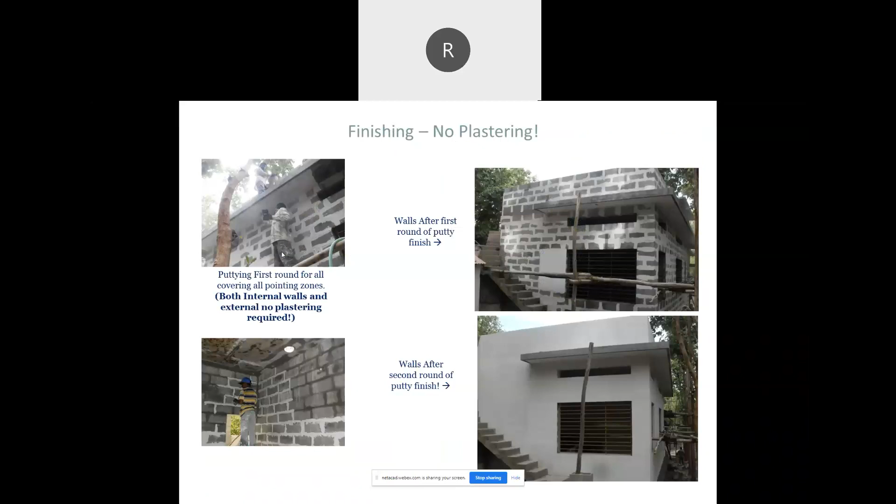Another example of innovativeness in masonry is the use of stabilized mud block as dry interlocking units. So I'm sorry, this thing is hidden in this toolbar.

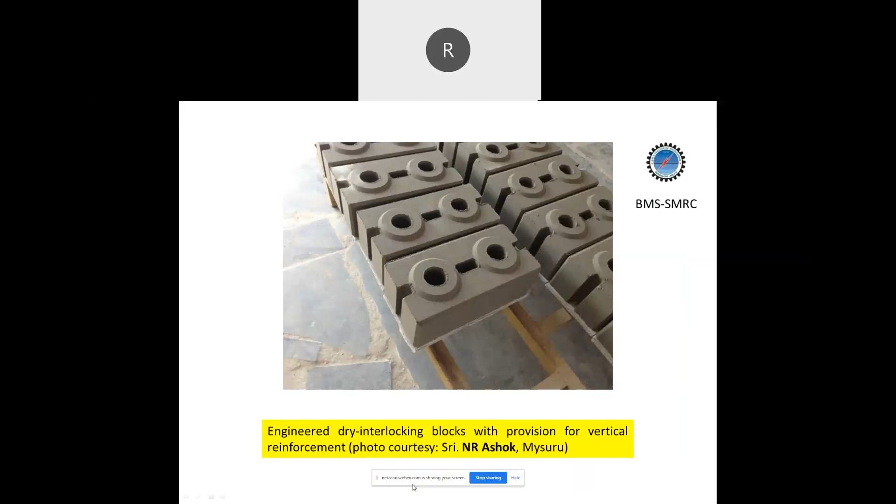So up to the lintel level, within a matter of an hour, you can construct the entire process. Of course, you have to use the appropriate process for the wet part of it. So this is a close-up view of the interlocking blocks. Engineer Ashok is also trying to come out with a lot of processes for this, precision and things like that. Back in Bangalore, there are quite a few architects who have been exploiting stabilized mud block to its maximum potential.

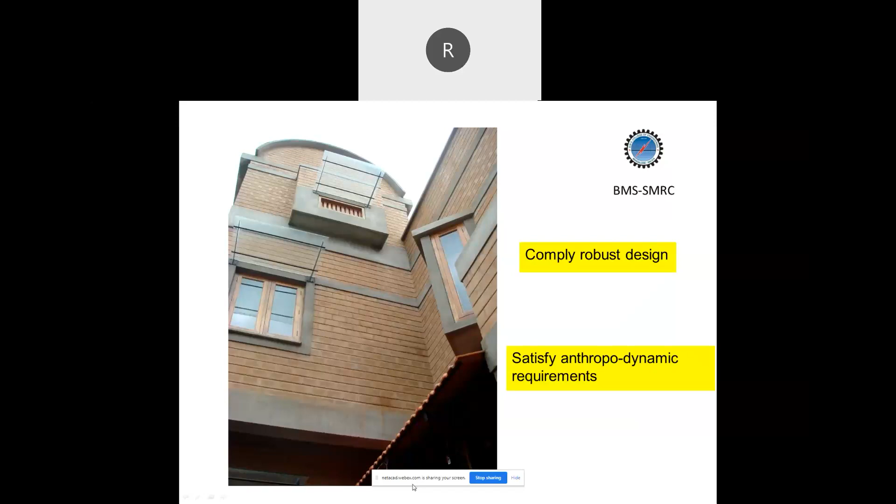People often tend to think that the floor plans have to be identical for getting load-bearing masonry. It is not really needed. Architect Prasanna has constructed quite a few houses of beautiful form. So the upper floor is projecting out, and wherever needed you can have the RCC elements. The beam is projecting. And wherever needed you can strategically introduce the reinforcement, or you can go for RCC columns. So this is a very good example.

If you carefully notice, there is use of stone pillars and cantilever RCC beams. So this is exploited to its maximum potential. Again, exposed masonry.

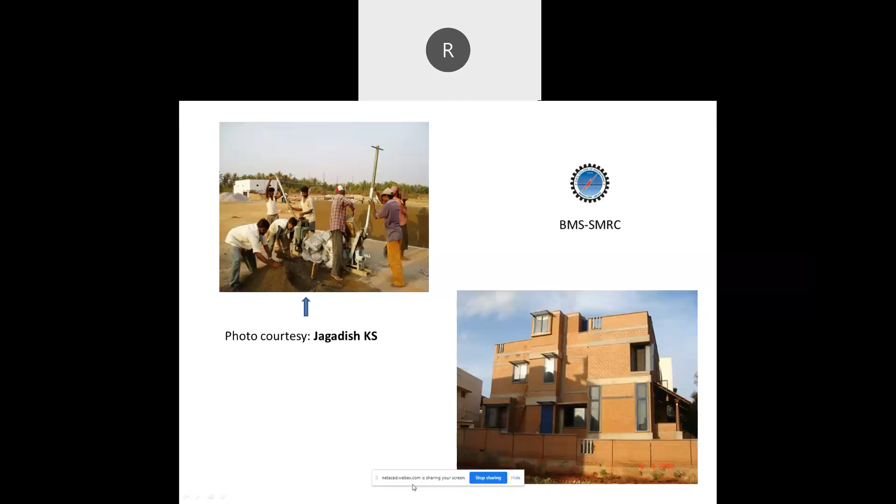So stabilized mud block has come a long way and is accepted in the urban context. You can also use it for roofing elements, a combination of a variety of alternative roofing solutions along with wall solutions. I gradually move on to the last part of my lecture.

When we talk about sustainability in the modern context, people talk about energy, embodied energy, and things like that. Here is an example of an engineer in Mysore, Ramesh Kikeri, who constructed his house using all possible sustainable technologies for all components, including water heating and solar power generation and so on. The embodied energy of the entire building was as low as 1.05 gigajoule per meter square. So it's one of the lowest embodied energies I have ever come across.

I would like to come to the last part of my discussion. One of my colleagues, Dr. Varsha, has studied a variety of forms of buildings: multi-storied buildings, single family buildings, multi-family dwellings, monolithic buildings, RCC buildings, and so on. We found something very interesting. Masonry dominant construction is not only cost effective, but also quite low in terms of embodied energy.

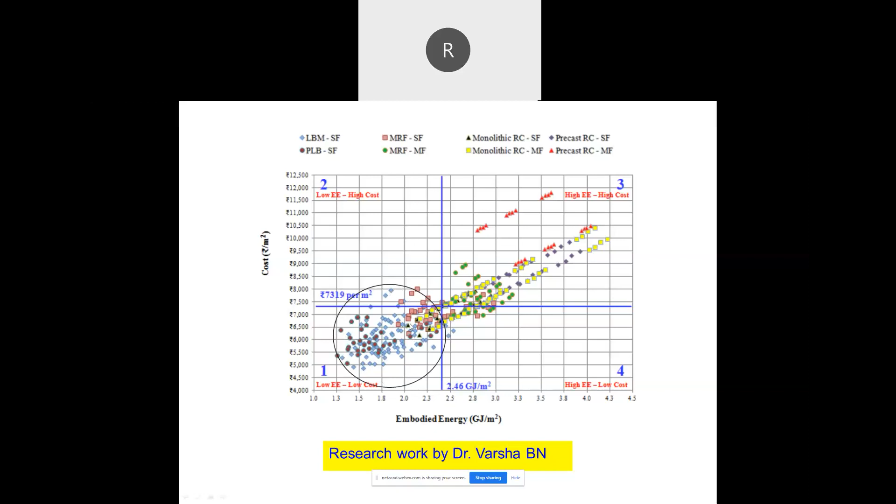But for low-rise structures, it's very interesting to note that masonry has a solution. Low embodied energy, low cost, a variety of options are available. These are some of the buildings studied by my colleague, and we found that masonry is quite sustainable from the point of view of embodied energy, not only from the point of view of cost.

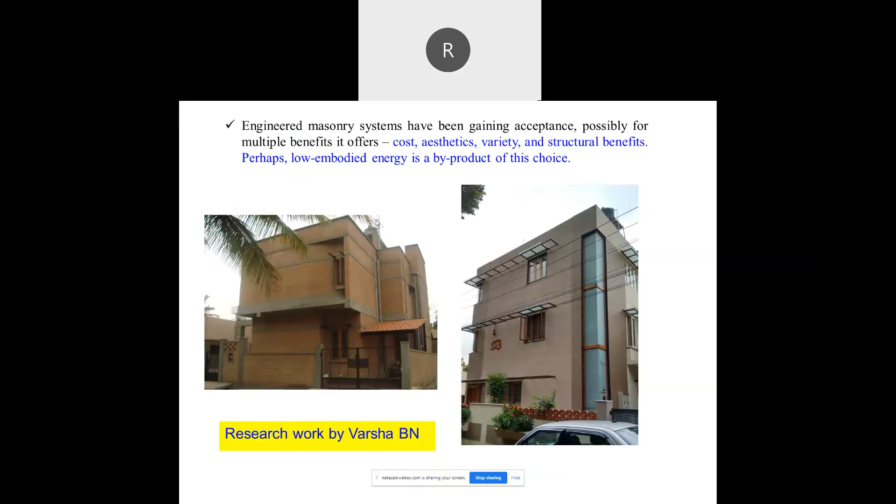Lastly, I would like to come to the last part of my lecture. I have made the case that masonry is sustainable in quite a few contexts, either rural or urban, where cost is a major constraint in one case and social acceptance is a major constraint in the other. You can notice that masonry is acceptable. So it's cost effective, it's acceptable, and we also found that its embodied energy is low.

In future it's also possible to talk about using masonry units to their complete potential, so it could also be sustainable in the long run. Some personal thoughts: whenever we talk about sustainable design and construction, the cardinal tenets are that we need to reduce, reuse, and recycle. We need to satisfy this.

The first step is to reduce the usage of materials as much as possible. That's very important. I've shown the example where, by avoiding certain redundant materials or components like plastering and columns, you can reduce the cost and the usage of materials. You need to exploit local resources. This is very important.

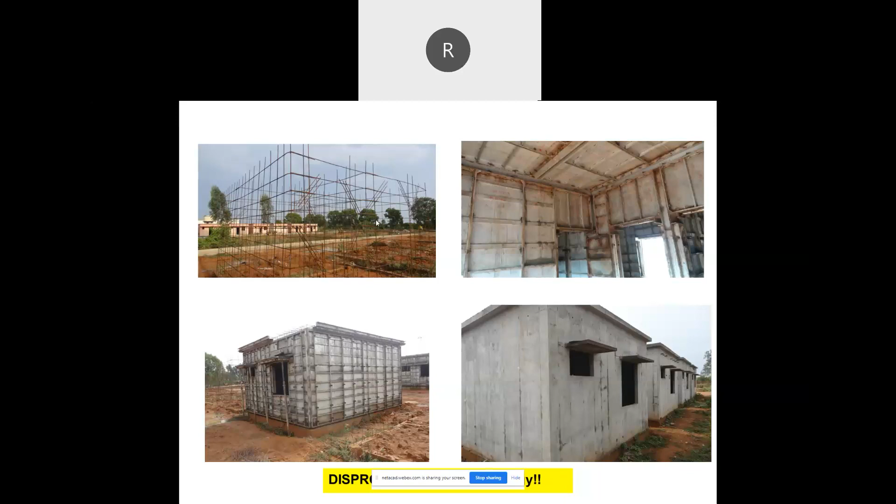You need to develop and promote technologies that generate employment, sustain employment, upgrade skills, encourage participation from wide skill sets, and open up new skill sets. You need to encourage masons to come, and come out with technologies that will ease masonry construction. In my opinion, in other processes there are a lot of gadgets and tools—to help the carpenter, to help the electrician—but unfortunately it's still not there for masons. We need to come out with such things. If masonry has to go to the next level, we need to work like what is being done in other countries. We need a lot of gadgets, tools, and training programs for the masons.

Lastly, I'll leave it at this slide. We need to reduce, reuse, and recycle. And sometimes we may have to refuse certain technologies which may not be really worth it, or could be inappropriate. With that, I conclude my lecture. I'm open for discussions. Thank you.

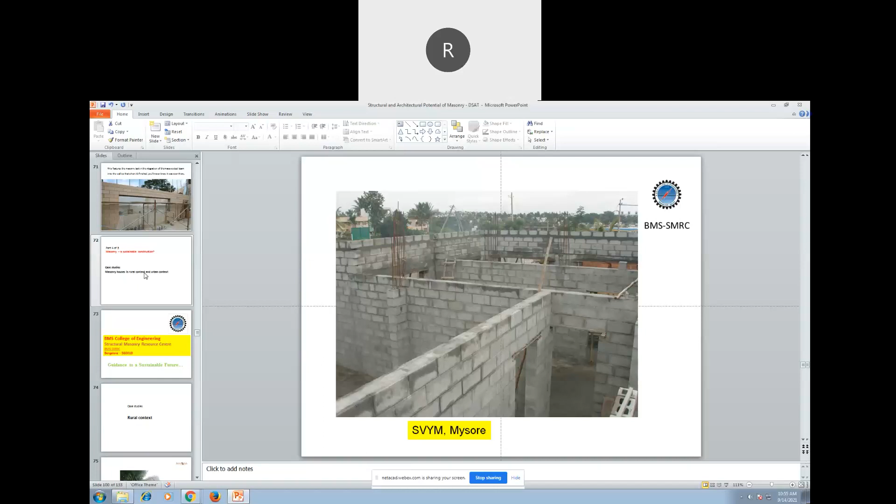In fact, tensile forces were not handled at all, they were completely avoided. What I talked about regarding the topology of configuration in the examples is that they had configured the geometry in such a manner that hardly any tension developed anywhere.

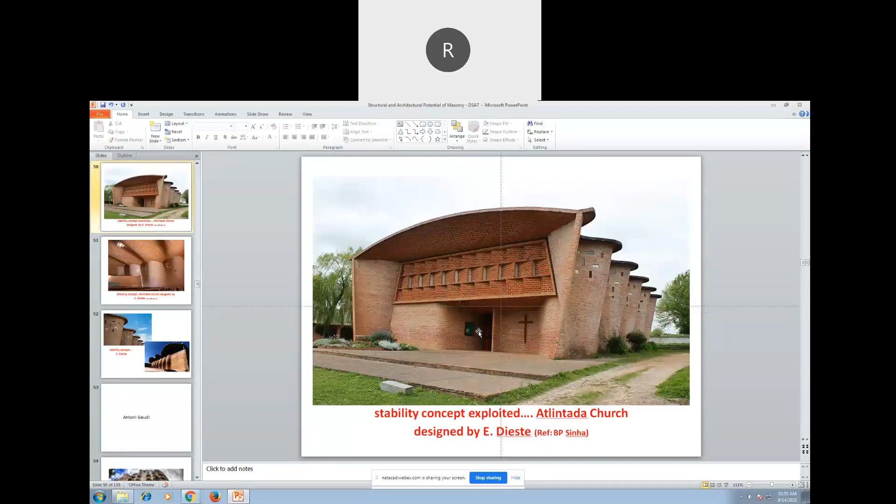For instance, in all these places, tension did not develop at all. The domes and the walls, with their massive wall thicknesses, nowhere was tension developed. Of course, the roofing element you see here is reinforced masonry. Otherwise, there's no need of tension reinforcement at all.

Back in India, there are innumerable examples. For example, the Taj Mahal is a fantastic example of masonry with no reinforcement anywhere. These are standing examples of how you can configure and construct masonry in such a manner that no tension develops anywhere. There are also innumerable temples and other monuments where no tension developed anywhere.

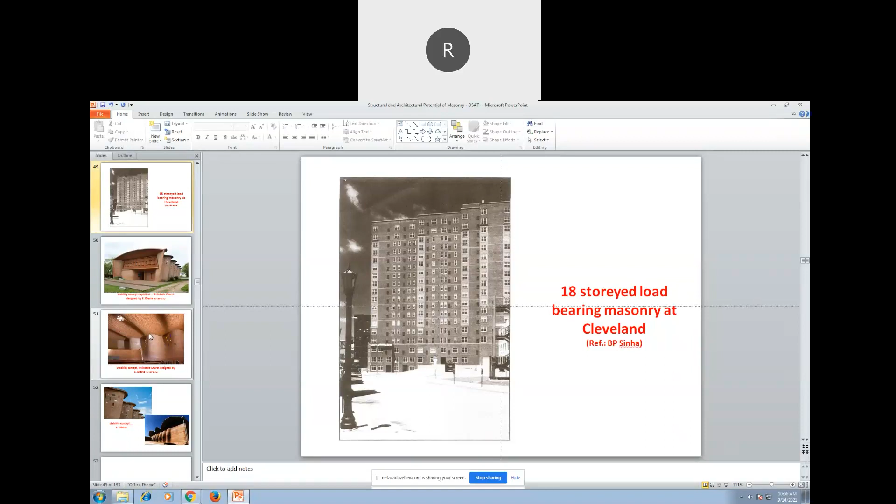The Vani Vilas Sagar Dam, which I showed earlier, is of course a gravity structure. The base is so large that the resultant passes through the middle third, so no tension develops anywhere. People did not encounter tension at all in their configuration, or rather, they used their ingenuity in such a manner that they dispensed with tension. That was the beauty of this earlier construction.

Thank you, sir. We have one more question from Girish. Sir wants to know what is the maximum span that we can achieve from a masonry structure, and if there are any restrictions for that.

As I said in one of my slides, the span depends. Let me go the other way around. In case you need to design masonry walls, the loads have to be computed - the load acting on the wall. Obviously, larger the span, larger is the load, and higher is the stress, so you need to go for better masonry.

For example, table molded brick is much better than country bricks. Wire cut bricks are much better than table molded bricks. Engineered blocks are much better than wire cut bricks. You can engineer to any strength.

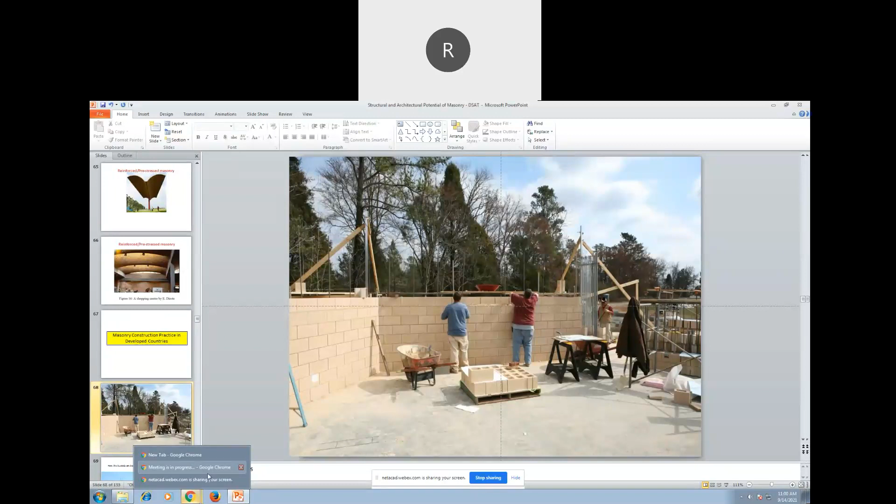Typically, I tend to make a wild guess that in load-bearing masonry, when it is supporting an RCC slab, when the RCC slab deflects, at the end there will be a rotation at the end of the slab which is supported on the wall, and that leads to a horizontal crack on the outer face of the wall. This is a common problem which I have seen in many places, not only in Bangalore, but many places. It has got more to do with the deflection of the slabs, that rotation which masonry cannot withstand.

These days we are using non-flexible mortars. Earlier we used to use mud mortar and lime mortar, which could take a certain amount of subtle deflections and rotations. These days we are using cement mortar, which is very brittle and very stiff, so a little bit of deflection of the slab leads to horizontal cracks. That could be one of the reasons, but without having a look at the crack pattern or the structure, I will not be able to comment much on that.

Of course, horizontal cracks do appear in a framed system also. That is because of the incompatibility between the infill and the surrounding masonry, RCC columns and beams. So in the event that there is even a slight lateral load, there will be a vertical separation and a horizontal separation. Cracks are quite common in most buildings, especially masonry buildings. I presume that could be the reason, though I'm just making a wild guess.